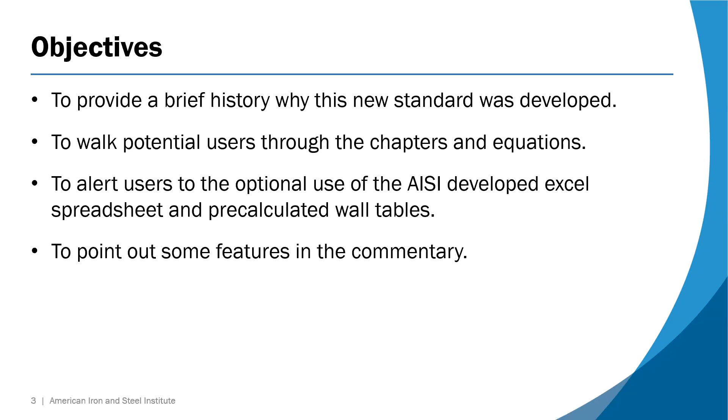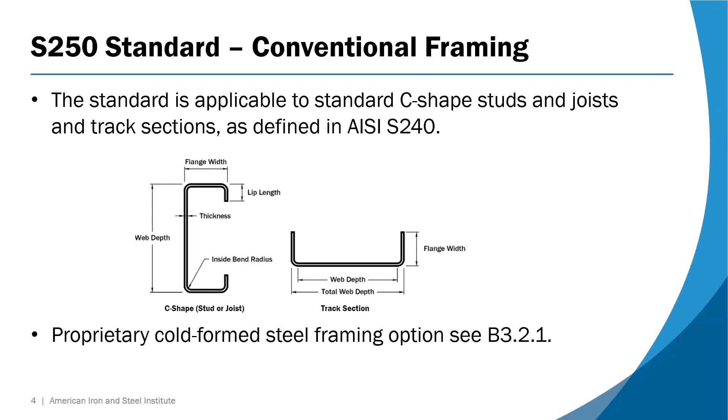So why was the standard needed? Well, back in 2014, one of the things the steel industry recognized was that, going through the different model codes, standards, guides, and other material dealing with energy efficiency, we had accumulated over the last probably 25 years multiple methods to do the same thing: how to calculate the effects of cold form steel framing in building envelope designs.

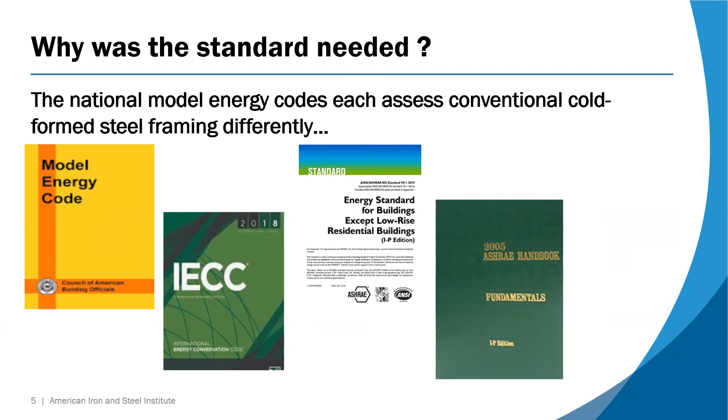For example, one of the first energy standards out was just after the 1990s oil embargo, standard 90-75. In there, they use the U factor based method. What's the U factor? Well, many say the U factor is the opposite of R value — that's sort of incorrect. R value is normally material related, such as the R value of insulation or a piece of gypsum board. Whereas the U factor normally applies to the entire assembly, not just a single piece of material. However, there were no specific provisions in the envelope assembly requirements for cold form steel. They merely said your wall had to equal an X U factor depending on what climate zone you were in.

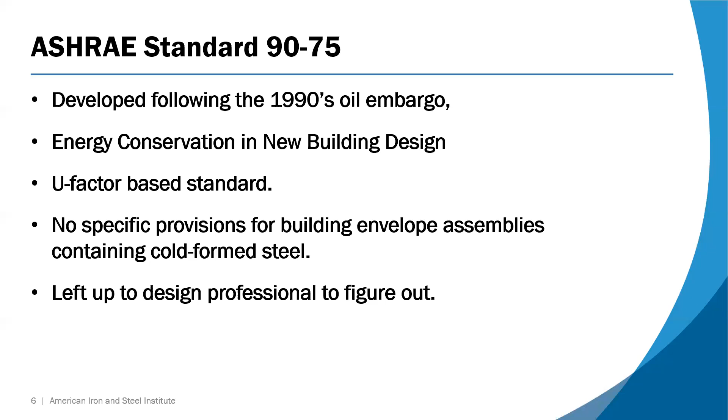However, it was left up to the design professional to figure out how to comply. This was frustrating. So by 1995, the Model Energy Code, which was developed by the Council of American Building Officials, which was effectively the three US legacy code developers at the time before the International Code Council came around, introduced the correction factor equations for opaque wall assemblies containing steel framing. The provisions contain both equations and a correction factor table to determine the impact of a piece of cold form steel framing in a wall assembly, and for only wall assemblies.

It was also limited only to 16 and 24 inches on center, another barrier that the steel industry has tried to overcome with the new S250 document.

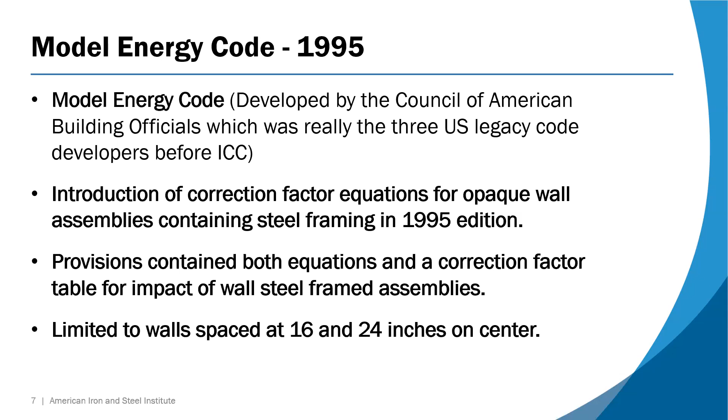Then in 1997, the ASHRAE Handbook of Fundamentals, which is produced by ASHRAE International—which you may have also heard about, ASHRAE Standard 90.1, produced by the same people—it's a non-consensus developed guide. However, it's considered one of the Bibles internationally to deal with thermal, moisture, and other subjects. It contains a parallel path and isothermal planes equations for simple light frame construction, such as nominal wood framing.

However, in 1997, it introduced what was called the modified zone method, which was created by the Oak Ridge National Laboratory. This became the benchmark because it was a more exact science on how to calculate the effects of cold form steel framing in building envelopes such as walls. It was extremely accurate. However, it did have its limitations.

It was limited to 16 and 24 inches on center, and it could only deal with insulation values in the sense that only if I had insulation in the cavity plus, say, continuous insulation on the outside. So it did have its limitations.

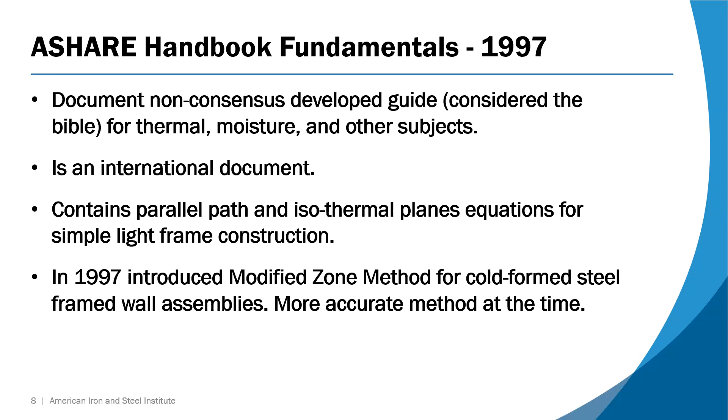Then the International Energy Conservation Code, which was first developed actually in 1997, but the 2000 edition came out with the parallel path correction factor equations, similar to what happened with the Model Energy Code in 1995. In 2003, as a result of the work by AISI, Owens Corning, and Oak Ridge Laboratories, as well as the Department of Energy, we introduced what could be best called correction factor methods for roofs and floors containing cold form steel framing.

The 2004 edition then changed, whereby the calculation methods, fairly simple methods, were replaced with simplified pre-calculated results installed in a table. Why? At that time, from 2003 to 2004, the Department of Energy and other groups wanted to make the International Energy Conservation Code much smaller and easier to use. So it was a usability change, if you will.

However, in 2015, we moved back to equations again. Now you can begin to see this buildup of how frustrating it was to keep track of things as well as determine compliance, because the number of methods kept growing.

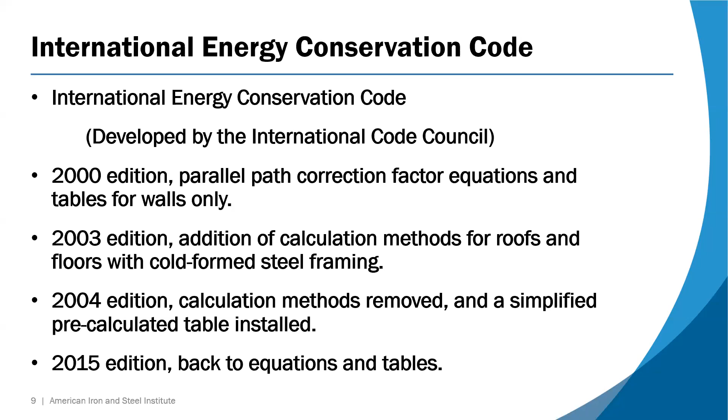The AISI Thermal Design Guide, while a guide only and not something usable for code adoption, did develop several methods within there to try to guide people on how to comply in different ways, depending on what jurisdiction you may be in, such as the state of California, which uses its own homegrown developed method of showing compliance by using simulation tools.

Whereas other jurisdictions might adopt the International Energy Conservation Code. Or if we go up to Canada, for example, they have the National Research Council of Canada's energy documents that are adopted by the provinces up there. A very good guide; however, again, it had the limitations on how far we had done research, namely for walls, which were primarily 16 and 24 inches on center.

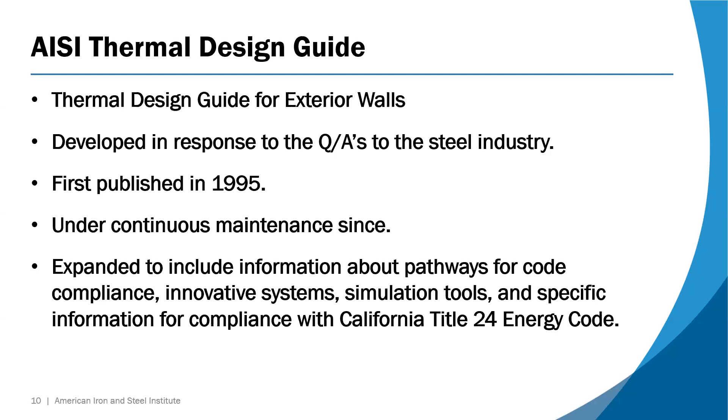And we found that in today's world, people are using different dimensions because of the type of construction going in place for a specific building project, or because of something that's needed to address, say, seismic or high wind regions of the United States. So in 2014, the Committee on Framing Standards, which is COFS, approved the proposal to create the new energy standard. The title at that time was North American Standard for Cold Form Steel Framing. However, as you see today, the title is a little different. That's what happens when you have a committee designing things.

The scope being that let's produce a document that can effectively address cold form steel framing for walls, for roofs, and if possible, floors in a standardized methodology. The whole idea being, let's produce a standard which can be adopted, versus a guide, which we've been doing for years, that can be adopted by a state or province or any other jurisdiction in foreign countries. And let's get rid of all these other methods so that we all work off an even playing field, if you will.

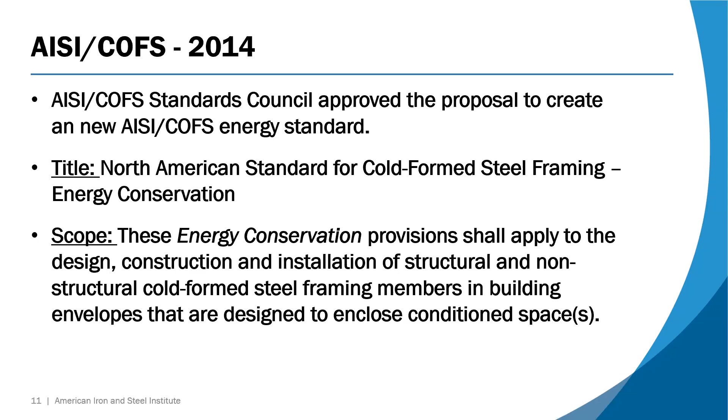So we went through research and development, hiring Morrison Hershfield, one of the recognized researchers in North America that does thermal analysis, and Dr. Merle McBride, retired from Owens Corning, who we had done work for years. Along with the task group members, they developed and finally published the document in 2021.

So what's the breakdown of the document? Well, its format is similar to the other AISI steel standards in that we have basic chapters covering administration, general provisions describing what the document will and will not cover, and Chapter B, which goes through the three types of typical C-shaped configurations in design.

We've also added an appendix with pre-calculated wall assemblies, so that rather than doing an equation, one can just look it up. We modeled that after what some of the codes had done. And finally, a commentary to help describe where to find things, such as the R values for other materials, or specific items about cold form steel to better describe it.

We keep the commentary because we want to separate the provisions themselves, the calculation provisions, from the commentary, so that the jurisdiction will be effectively adopting the standard requirements. As part of the adoption process by most states, they don't want commentary in code, so as long as we separate it, they're happy with that.

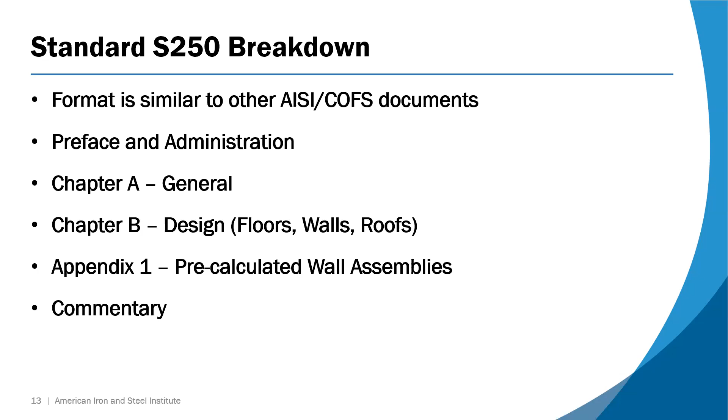Chapter B, design. That's just where we'll be going through the entire document here as to how it works.

The task group determined that at the beginning there was insufficient test data to support a proposal at this time for floors. Although we had done the research in 2000 for the 2003 IECC, we have a research request to do more there. That's not to say that calculation procedure from 20 years ago is wrong. We just want to refine it to greater detail so that we're not overemphasizing the need for insulation, but rather giving a true evaluation for floor assemblies.

Walls, there are 3 methods in the chapter. One's called OTZ, and we'll talk about that title in a minute. Method for proprietary steel, this takes a little work, and I'll describe that a little later on the methodology there. And appendix 1, where we have pre-calculated wall tables for typical designs, mostly for residential, but for commercial too. And finally, roofs. There are 2 methods there, using conventional steel joists and truss constructions.

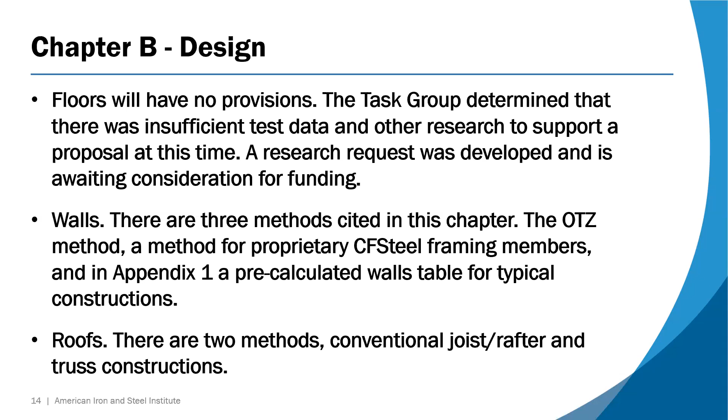Now, before I get into the walls method, are there any questions at this time? Do we see any in the chat box? Not yet. Boy, I'm really good today, I'm hot, look out.

Okay, we'll start with chapter B, walls, OTZ method. How did we come up with that? Well, we all sat around and thought of an individual name, overall thermal zone. The intent is to convey that the focus of our equations is the impact of the steel to the entire wall. It is a 3-dimensional effect, unlike many equations for wood or other materials which use 1-dimensional type equations. Our equations are based on 3-dimensional analysis, meaning we look at aspects in 3 directions, not just 1.

It's 8 basic steps with 12 equations. However, we realized from the beginning, if we're going to get this document recognized and used, we're going to have to make it simple for the general public, as well as design professionals, code officials, contractors, builders, and building owners. So we designed the methodology such that it only requires simple math, and all the other hard features, I'll call them coefficients, are already done for you. You only need to know the basic material types and simple math such as addition, subtraction, multiplication, and division.

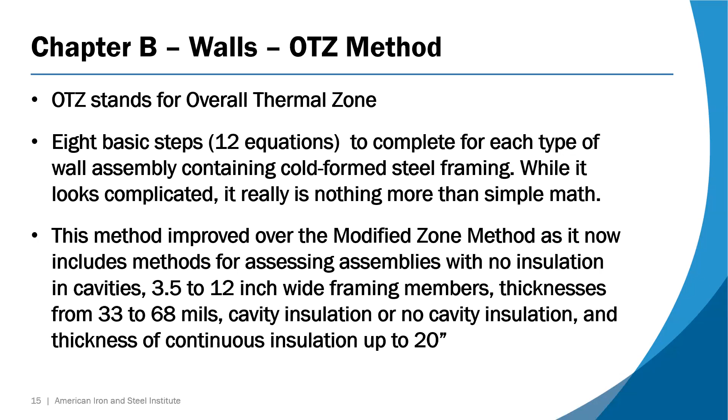Wall information, what does the user need to know? The wall assembly design, what are you designing for? That's going to be structurally based mostly.

Other impacts to the design may include acoustics, for example. You may be in a jurisdiction where the inside acoustics have to be assessed, and that may impact your design on how much insulation one puts in.

You also need to know the list of materials other than steel that representative thermal values of the wall assembly, such as outside sheathing, plywood, OSB, gypsum board. Inside sheathing, what's that going to be? Just gypsum board or some other product?

The types of insulation you have in mind, the exterior siding, et cetera. The other items needed are all provided for you, such as the list of coefficients, conductivity values, and other data concerning steel presented in tables.

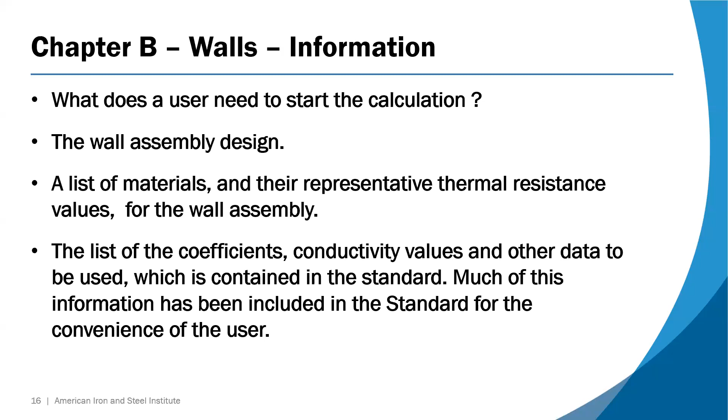So one merely needs to pick the size of the member and then take the numbers that are equated to it in each of the tables. So let's start with a wall type here.

What do we see? We see a wall type with exterior air film. We chose a stucco siding. We put on continuous insulation, which we call foam sheathing, gypsum board outside, partial cavity fill with batt insulation. In this case, we're going to use a 2x8 C-shaped member.

While not normal in the field, we know that 2x4 or 2x6 is more common, but in this case, just to show you how far we can go with this, we also have an airspace in the cavity along with the insulation, which is not unusual in today's market.

Because many builders, as well as owners, in order to be cost effective, want to run conduits of wiring, telecommunications, even piping through the outside walls. If they don't have to muck with the installed insulation in order to install their product, that's a better labor saving mechanism, if you will.

And then gypsum inside and interior air film. Be aware, air films are a static number and we provide those for you. However, for the other ones, we have to have the designer, owner, or builder go out and find the numbers from the manufacturer and use those in the equation.

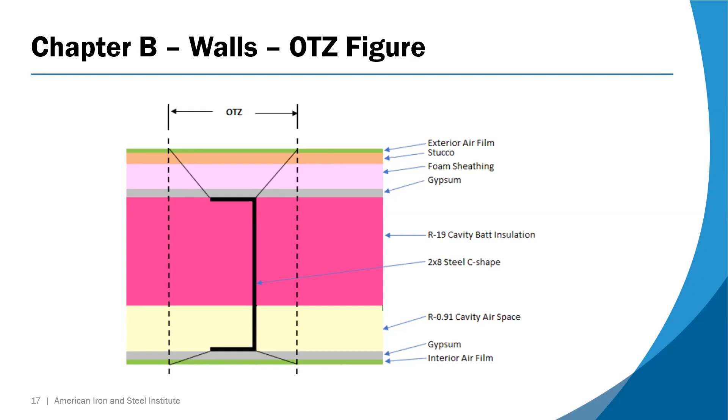Now you notice here, the OTZ is that area around the stud. Here you can see its total effect three-dimensionally. This is the effective area of how much cold form steel can be affected by the transmission of cold to the heated or conditioned side of a building.

So in this case, we chose framing spacing 16 on center, flange width 1.6 or 1 5/8, web depth 8 inches, base steel thickness 43 mils or 0.0428 inches if you use a ruler, and the conductivity of 495, which is out of one of the tables there. So here we have the basic steel dimensions.

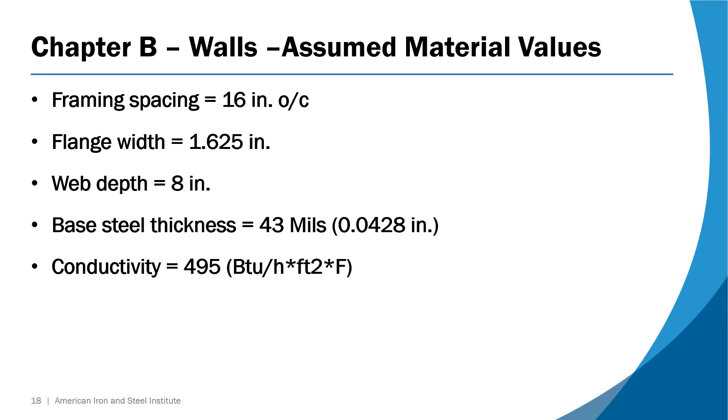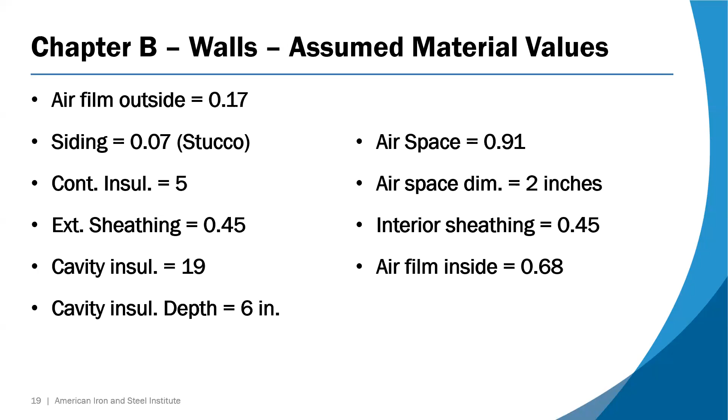Now for the remainder of the materials that make up the assembly, the outside air film, the siding, the continuous insulation, sheathing, cavity insulation depth, we have to know about it. Could be full depth, half depth, or even 0 depth. If there's an airspace, that's optional. In this case, we put it in just to show you how it works, as well as the airspace dimension, interior sheathing, and the inside air film.

So now we have all our basics. What are we going to do now? Well, for the national model codes, such as standard 90.1 and the IECC 2024, they've added some additional features that we need to be aware of beyond what the standard currently states.

Item A: where steel frame wall contains no cavity insulation and uses continuous insulation outside of the cavity to satisfy the U factor maximum in the energy tables or climate zone tables, the steel frame wall member spacing is permitted to be installed at any on-center spacing. Why? Because if I've got my insulation outside, that's effectively demonstrating compliance, and the framing member is not penetrating it in any way, shape, or form, so it doesn't matter what my framing spacing is. I just use the outside insulation value.

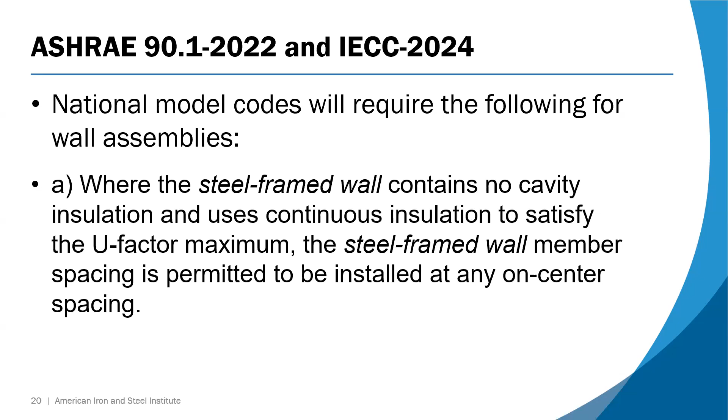B: where the steel framing wall contains framing at 24 inches on center with a 23% framing factor, or 16 inches on center with a 25% framing factor, the next lower framing member spacing input value shall be used. What does that mean? If I'm doing a load-bearing wall condition for a building, such as a house or a small building up to 9 stories of cold form steel, and my walls are load-bearing, I'm probably going to have, depending on the spacing, a 23% or 25% framing factor, just because of the number of members I have to have there structurally.

So what do I do? Well, when I use the equation, rather than using a 24-inch on center value to calculate, I go down to 16. And if I have a 16 inches on center in my design, I go down to 12. That's in order to compensate for the amount of framing I'm going to put in structurally for a building.

Where the steel frame wall contains less than 23% framing, example curtain wall, I can just use the regular values of my equation. So if my framing is at 24 inches on center, I install 24 inches on center in my equation and I'm good to go. Why? Because I have far less framing taking up space in my building envelope wall than I would if I use load-bearing conditions where I have all sorts of stuff to deal with, such as jack and king studs, headers, sills, etc.

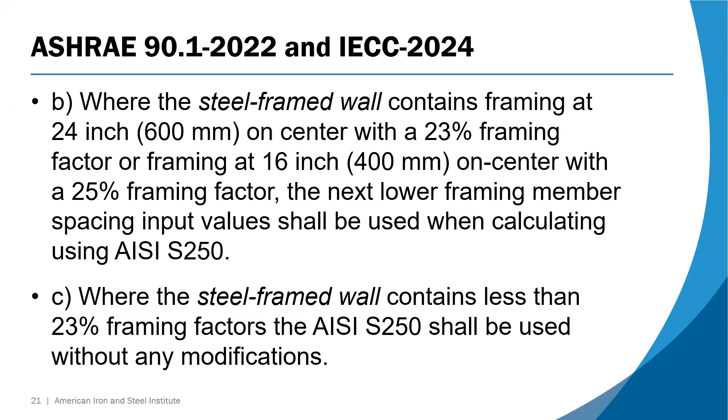Anytime I see the letter C in the equation, I've already got that number chosen from a table, so I've got half my work done already. The other values I need to know are what is the cavity insulation and what's the continuous insulation, and is there any airspace. And then I can calculate my first equation here, which is determining the overall thermal zone.

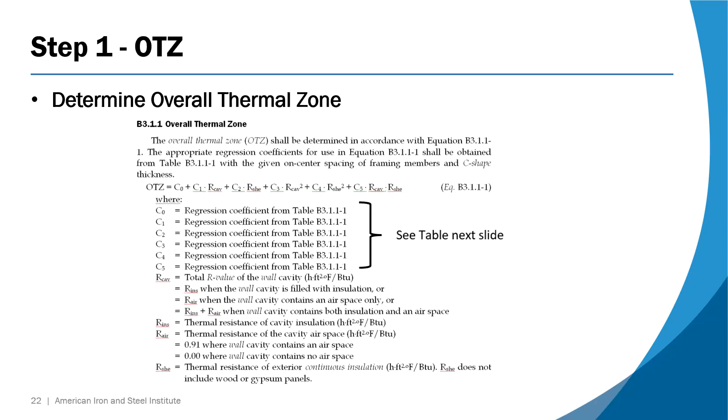If you remember that diagram I showed earlier, the impact of the cold form steel framing. And when I talked about all the C values, if you recall, I chose a 16-inch on center framing type, the C-shape designation thickness 43, and they're all my numbers that I need to know to install my equation. That's half of my work done.

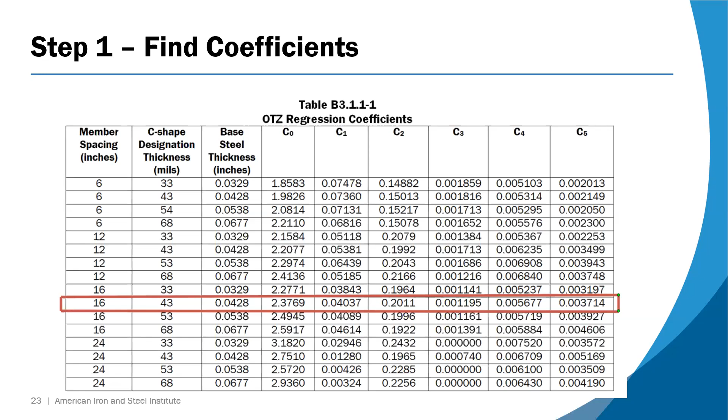I move on to my next equation, where I have to determine the framing factor. And there, again, I go up and I know what the mils of my framing member are. I know the flange width, and therefore I can just basically calculate by dividing.

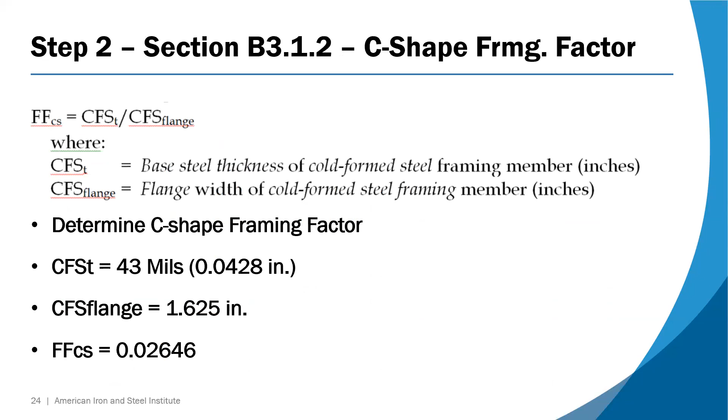Step 3, same thing, I'm in a division equation. Here I'm determining the C-shaped path and its impact. The depth is 6 inches. However, note the insulation is only in contact with the stud that I'm calculating, not the total depth of the framing member. In our case, we chose 8 inches, but only 6 inches is in contact with the framing member web, and that is of the insulation.

And just as a reminder, everybody, when doing cold form steel framing, we need to specify, when either putting our specs together or purchasing a product, we need full width batts from the manufacturer, not nominal. Full width, because in steel framing I also insulate the inside of the steel web of the C-shaped member, not just between framing to framing in the wall.

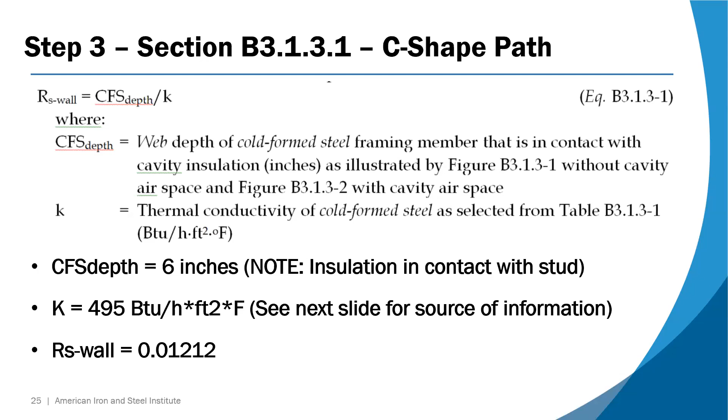My K value in bullet point number 2 is determined from a slide that comes next. And so by putting those two values in, dividing, I'm done. I get my result of 0.012. I put that in my pocket, keep it for a future equation, and you'll see how that works together as we move on. Step 3, again, there's where I got my, if you see on the far right, my 495, what's called thermal conductivity, or it's also referred to as the K value.

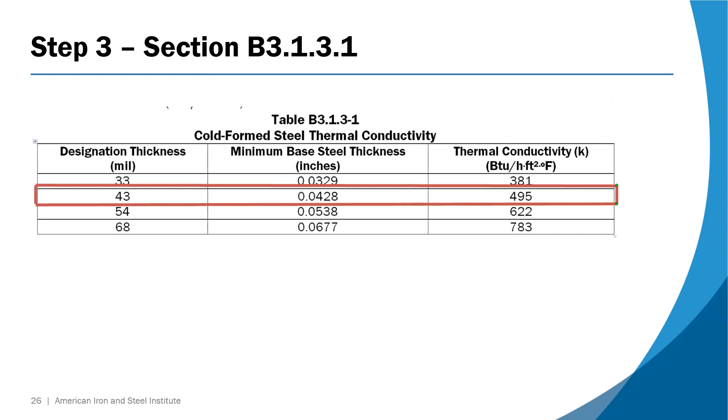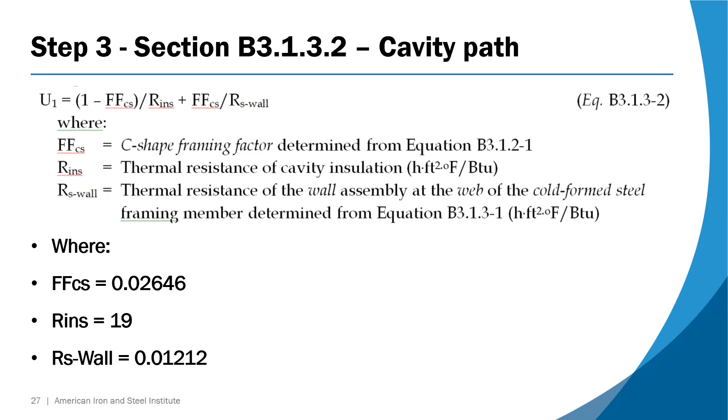My next equation for the cavity path, I'm looking at the thermal resistance of the cavity insulation, the web, etc. And I'm doing, again, a very simple equation, subtraction, division, addition, and I'm done. I'm now beginning to install some of my values. If you see under the equation FFCS at the top of the bullet, below the where sign if you will, I'm now pulling in values from other equations and installing them into my equation here. I will continue doing that throughout this in order to figure out what effect cold-formed steel has. Here, all I'm doing is turning my R value, or U factor that I've gotten so far from the previous equations, into an R value. I now put that into my pocket, and I will use that in a later step.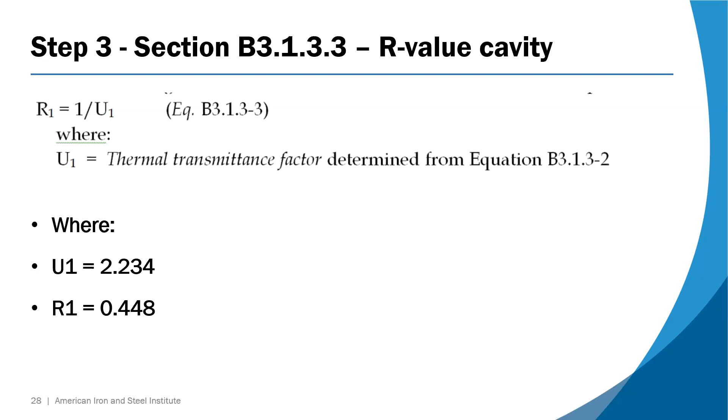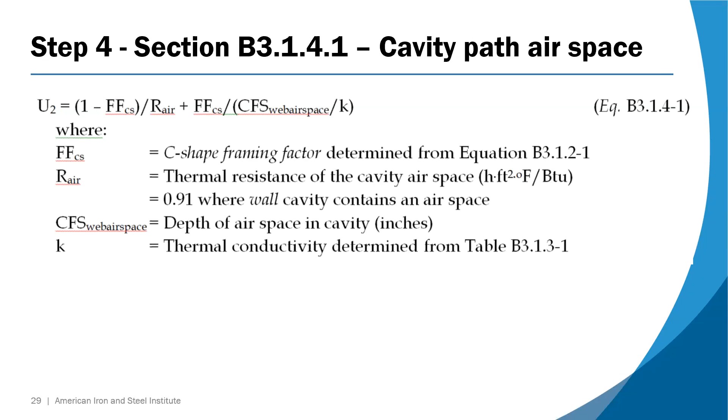Again, I use the cavity path, and I'm determining the effect of the web airspace, in this case that 2 inches I mentioned. Again, simple math, subtraction, division, addition. And I'm coming at the net result, which is a U factor. And here we go with the values I've installed.

Now the 0.91, where did that come from? We get questions about that all the time for R air.

0.91 comes from ASHRAE International, two resources for that: the Handbook of Fundamentals and ASHRAE Standard 90.1, which determined through research that if I have a cavity and the airspace is greater than, if I recall, 1/2 inch, or the full cavity, I can assign an R value of 0.91 simply because I have an airspace, and that airspace has some insulation value. Not a huge number, mind you, but it does have a value.

Again, the web airspace is 2 inches, the K value 495 we got from our table, and we come up with a U factor of 7.6.

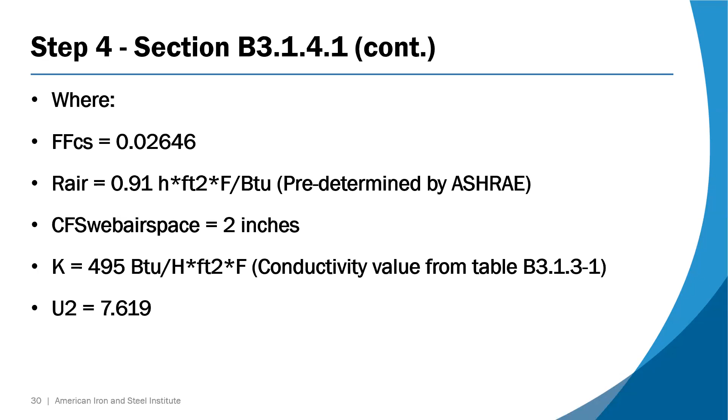I now move to part 4, or step 4. I'm turning my U factor into an R value. I'm putting that into my pocket because I will use it later.

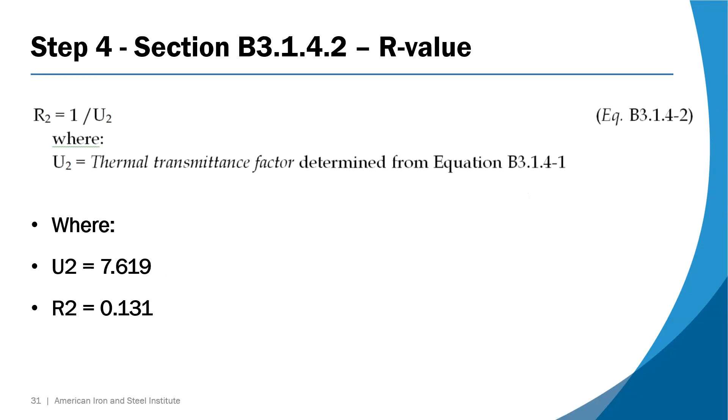I'm now combining the two R values, simple math, addition in this case. I get the values from two previous sections, or their equations, results if you will.

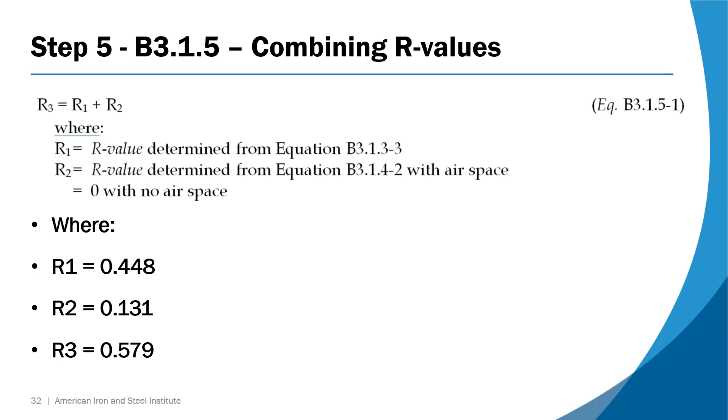Now I begin to calculate the two paths you saw earlier in our drawing. You'll see it in just a minute.

I'm calculating the entire wall now. In this case, air film outside for R sub O. Side exterior is the thermal resistance of the exterior siding. The sheathing, the R value determined from a previous equation. Interior sheathing and the thermal resistance of air film.

Again, the air films are a standard value and apply to most any walls: 0.17 for an outside air film and 0.68 for an interior.

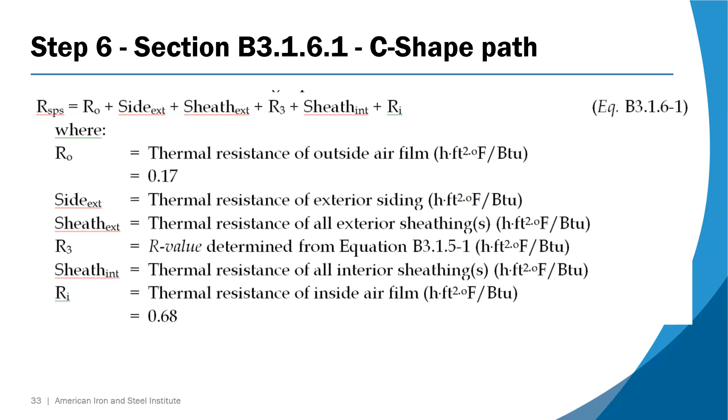I'm now putting together all my work into final steps to give me a final value of the impact of not only the steel, but the impact of the wall without steel, and then combining the two at the end.

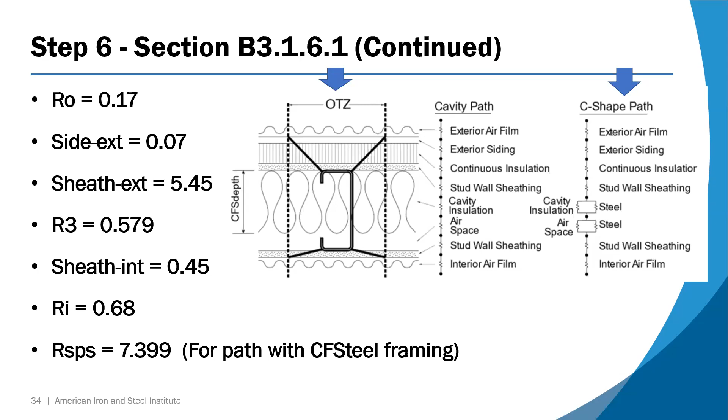This equation for the cavity path is the same as what we saw before, except I'm excluding the steel. And that's all I'm doing here: an addition of all the member components, in this case siding, insulation outside and inside, air films, the sheathings.

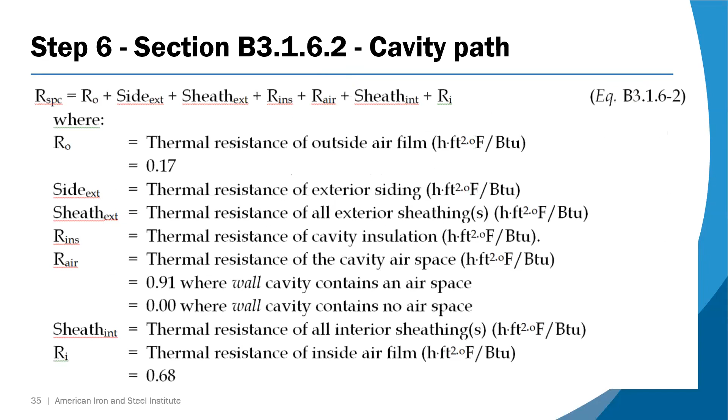Finally, step 7 and 8, I'm beginning to finish my work. Again, I'm pulling from the OTZ at the very first equation. I'm putting that value and dividing it by the spacing of the cold form steel framing to show its impact.

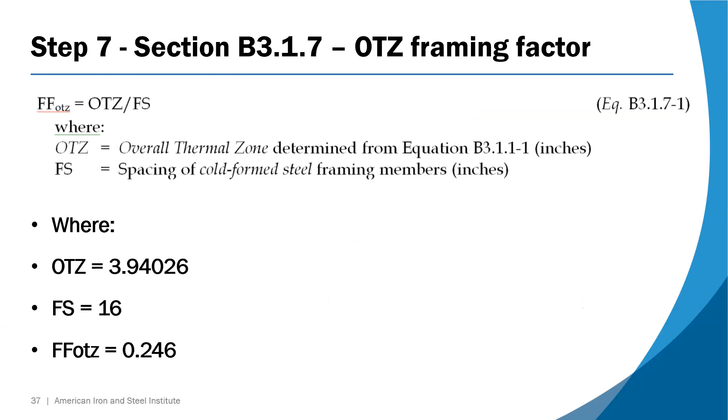And finally, my net result here is a case where I'm dealing with subtraction, division, and addition, where I'm taking the two wall types, the impact of the steel and the impact of the wall without steel, combining the two, and my result now is 0.061, which is a U factor number.

U factors, by the way, don't have any scalable value, they're just a number. I now compare that to my energy code that I'm complying with.

I look in my code and say, if I'm in Memphis, Tennessee, I'm probably in climate zone 3. And if my maximum U factor is 0.070, I've complied. I can now get a permit and put up my building.

Now that I'm at the end of this, do we have any questions up to this point? I know this was complicated and rapid succession, but let's see if there's anything that's come up for the most complicated part of this document.

Nothing has come up quite yet, but if anything does, I'll be sure to let you know.

Very good. Again, feel free to ask any question whatsoever, and we can try and go back to it and help you with the answer.

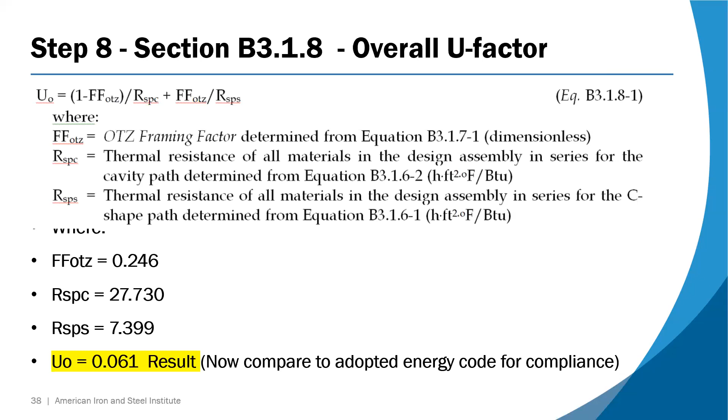Other than standard C shape, this was put together for design professionals, but more so for code consultants, specifically those who deal with thermal analysis.

Somebody raised the question: okay, I've got proprietary designs, how the heck do I figure this out? Well, what we said was...

Let's design a formula that has 5 steps and uses what's called a linear regression curve. Basically, another phrase for it is a curve fit approach, where I use hotbox testing data or other testing data to complete the analysis. In the case of ASTM C1363, that's the hotbox test that most everybody uses.

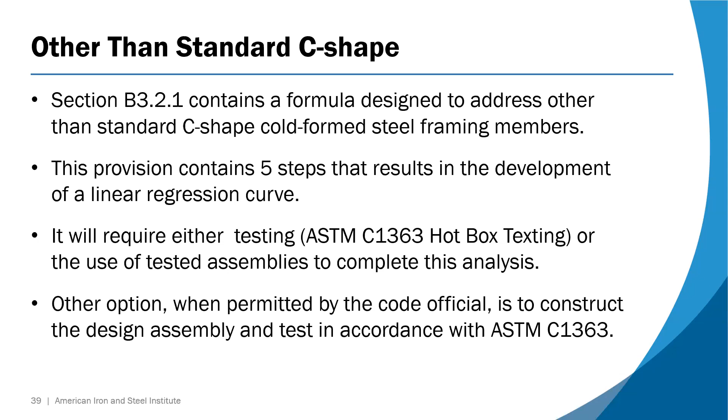Oh, that's the appendix already. I'm sorry, I moved too fast.

So what I'm doing in this one is taking 2, 3, 4, 5, or even more test results, putting them on a graph, seeing how the dots line up, and putting in a curve in order to substantiate how the wall will react to thermal transmission from hot to cold or cold to hot. I do need some background and experience to understand research projects and the test data in order to make sure I'm comparing oranges to oranges. I'm putting data points on a graph to create a curve, then finding where my designed wall fits on that curve, and using that as the basis for determining the maximum U factor for that assembly.

Most people do hire this out because the machinery today for calculating this has gotten very sophisticated but simple to use, and it's becoming more widely used and more widely accepted.

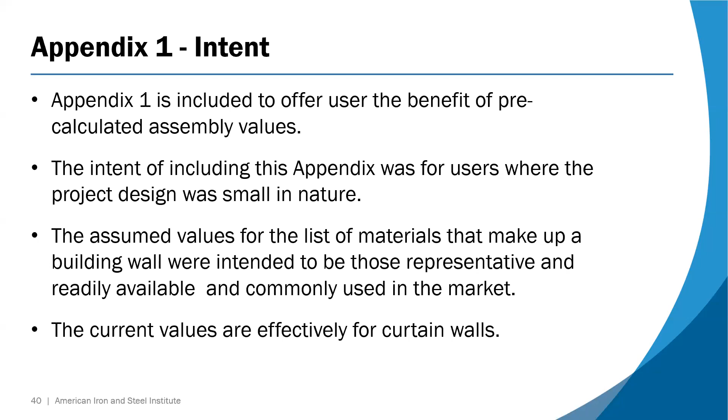Now let's move on to the next item, Appendix 1, where we had pre-calculated tables. In our Appendix 1, we predetermined what the assembly would be, and this is a cut and paste from that. Basically, framing as shown in the table: flange width at 1 5/8, 43 mils, conductivity 495. Sounds similar to what we did in our example.

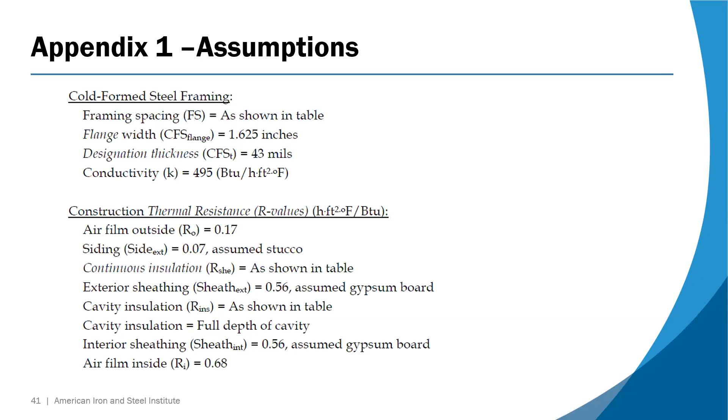And then our other construction materials: siding, continuous insulation, exterior sheathing, cavity, etc. Using those values, which are probably the most common that we see, although not exclusive, we began to put together tables that said, okay, if my framing member is 3.5, 6, or 8 inches, meaning the web, and my cavity insulation is 0 through 25, here's what happens when I add, say, R1, R2, or R3 to the outside of my wall. Here's what the U factor turns out to be.

Simple menu approach, like going to a diner. You just choose what kind of wall design you want, and then see if what you want to put on for continuous insulation complies with the code. So if I choose, for example, 3.5 inch framing, a cavity insulation of 15 batt on the inside of that cavity wall, and I'm putting R3 on the outside, you'll see that the value equates to 0.079 U factor. I now look into my code, and as long as I've got a value in the code that's greater than 0.079, I can demonstrate compliance.

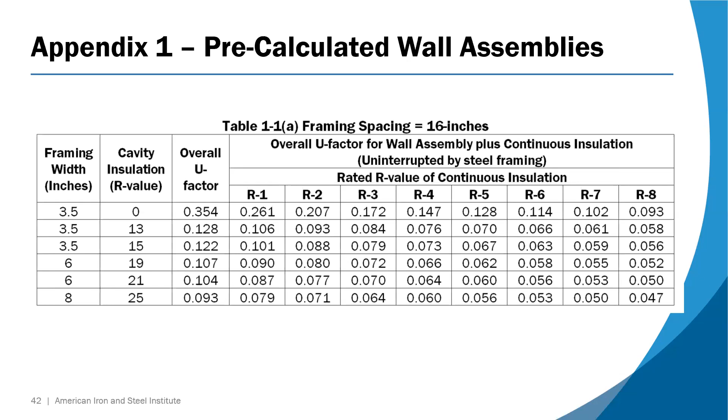Now, another feature we put together is a calculation spreadsheet. We got the idea, and some of you may recognize this, from the Department of Energy's creation of the COMcheck and REScheck calculators that most building officials in the United States accept as an alternative method of determining compliance. Well, we've done the same thing here.

First, we start off with the information you have to put in to start. This is essential because if you're going to do a calculation, we have this in there so that when you see the results on another page and print it out, the code official can look at it and determine if you followed the rules and demonstrate compliance.

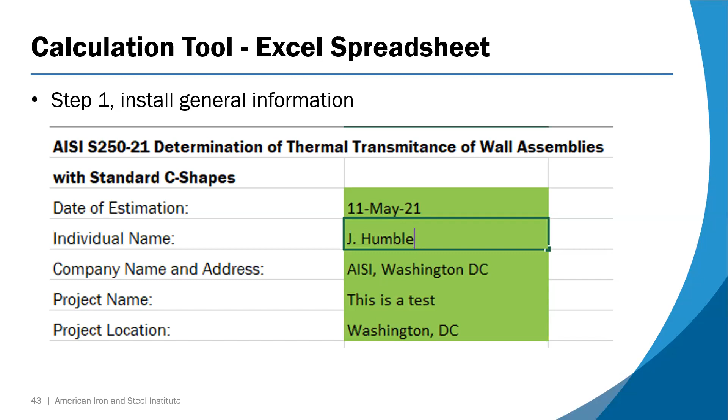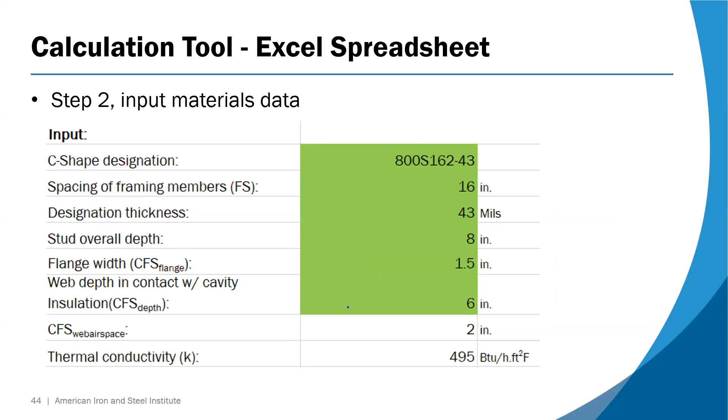In addition, we've colored the boxes to show you that these are the only boxes you can modify. We put in the shape designation simply as a recording mechanism, but the important features are framing spacing, designated thickness of the framing, stud depth, flange width, etc. You install the numbers just as I showed how to do the hand calculation method before.

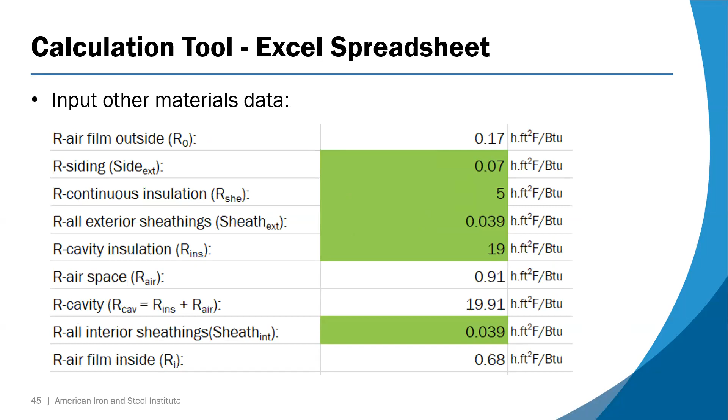Here's some other additional features, again the same types of material data that I showed at the beginning. We fill those in, and within seconds, as soon as you click outside the box, you effectively see the following: at the top the name and the date, so you can keep track of your design. All the configuration inputs are shown, and the result at the bottom shows what the net effect is for U factor.

You now compare that with the code in effect. This is a good thing to hand over to the code official who could do the same thing. He could take it and say, okay, give me a few minutes here. He may have the same calculator, he'll do the same inputs, and if he comes up with the same number, you're good to go.

It's also much faster in the sense that, okay, now me as a building owner, design professional, or even a contractor, can modify it to try and get even better stringency, depending, and at the same time, depending on what the cost of the project is, to try and come in under budget with a better design, such as if somebody was going for a LEED project, a GBI Green Globes design, or something like that.

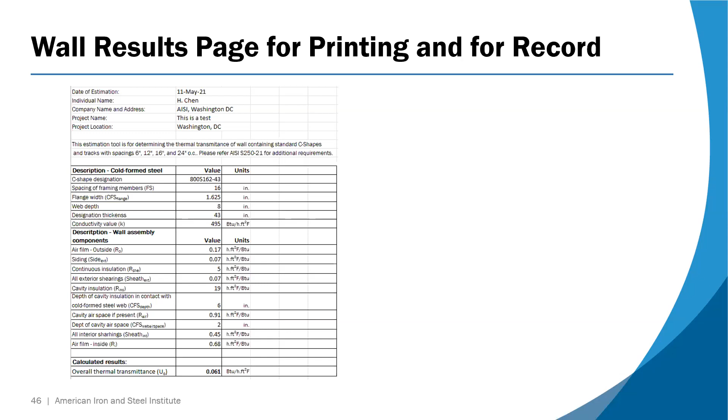Now let's start with roofs. This covers only conventional C-shaped only. I can't emphasize enough, however, proprietary designs, by the way, which most roof trusses are, can use these procedures. However, the result will be a more conservative result for the roof assembly than if they hired, say, an energy professional to do a computer model of it, or even doing a test.

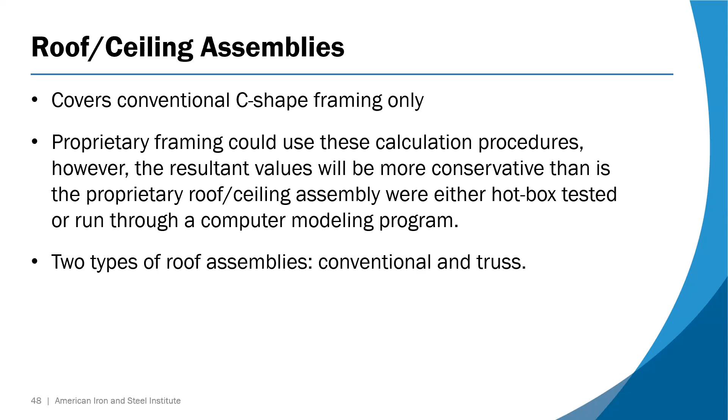There are two types of assemblies in this case, conventional and truss type. For conventional, these are standard C-shaped. It's a pitched roof design, most likely. And all I'm doing is addition, multiplication, and division.

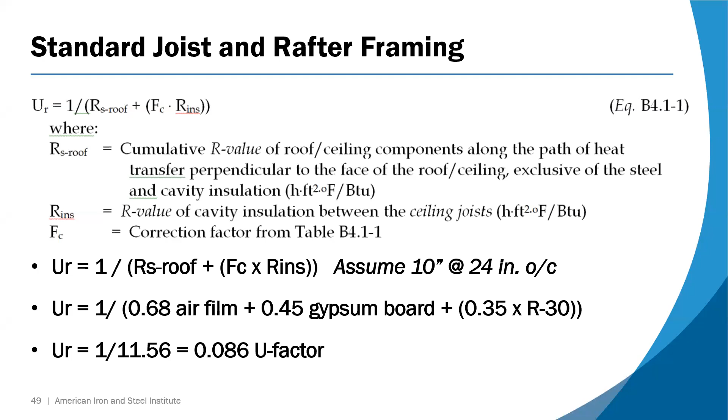Just like the walls of 1995, we're basing this off a correction factor method, meaning if we know our values for the insulation either in the cavity or outside, we merely apply the correction factor to the insulation within the cavity only, and assume all other values are free and clear of the deduction that the steel has because they're outside the framing. We did an example equation here, fairly straightforward. By the way, these equations are also in the spreadsheet for you to use if you want, but quite frankly, you can do it faster on a hand calculator.

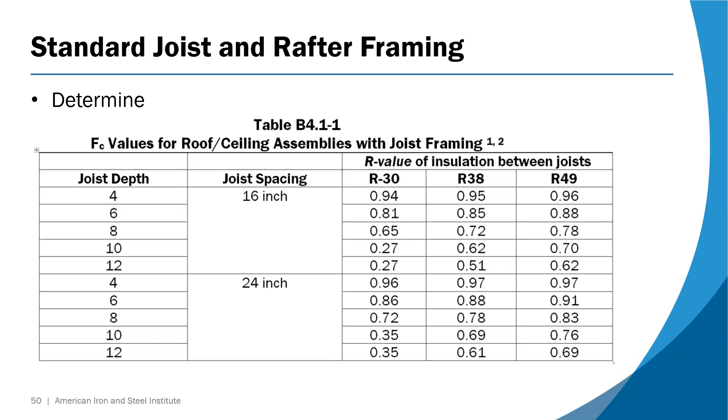As I noted before, the same thing we put in the roof calculator as we did for the walls, same calculation sheet. All the green boxes, you fill in the blanks and it produces a value for you in a matter of seconds.

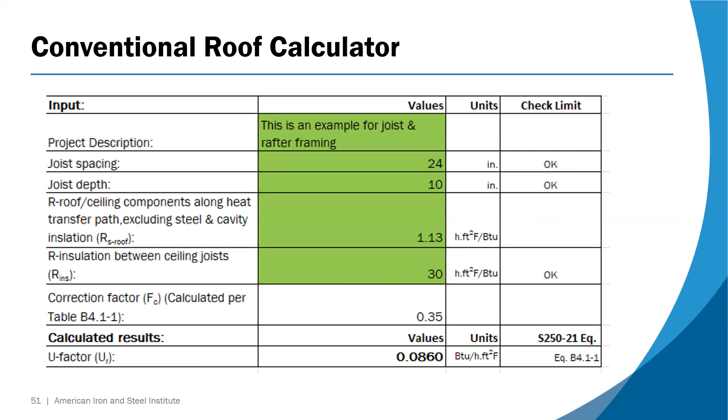I install in the RINS location what my value is for insulation, and for a simple truss with no continuous insulation, I simply execute the calculation and I have my number.

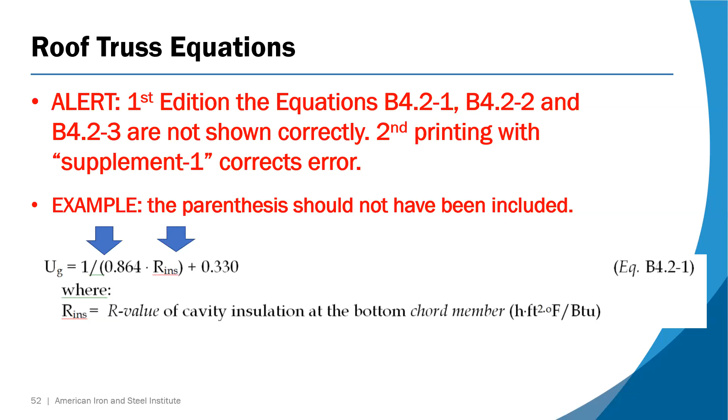And here's one of the example equations, if you will. You can see how much the impact to steel is without continuous insulation. Steel does have a great conductivity value. However, it also has great structural capabilities and other benefits. It's just that when we come to energy, steel does a good job of transmitting.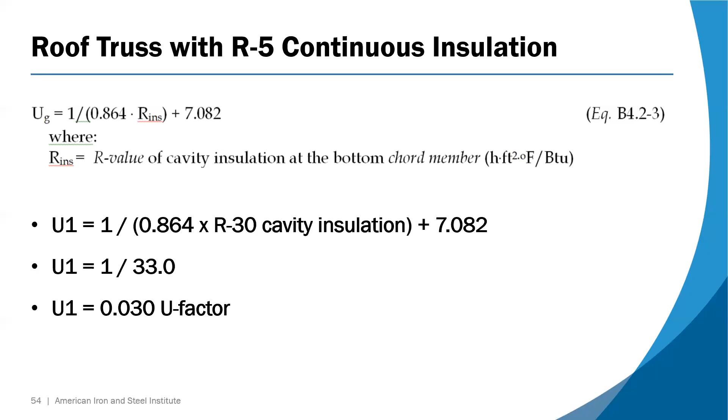And again, we have the same truss calculator in it. However, ignore the 'do not use' - the new calculator took care of that problem you saw earlier. That has been corrected. But the same thing here: I fill in the blank of my general job description, fill in the values in the green space, and it automatically calculates for me.

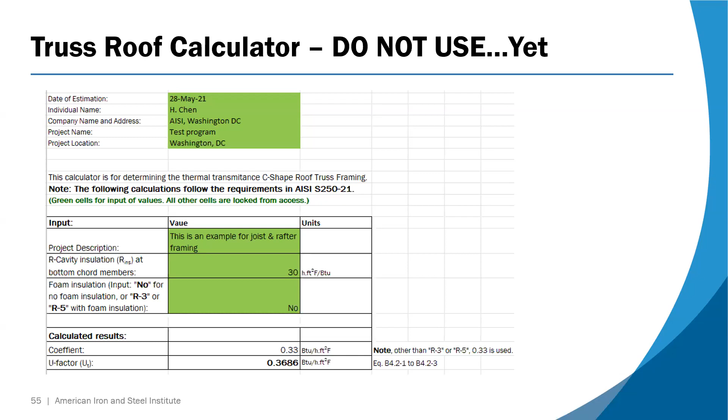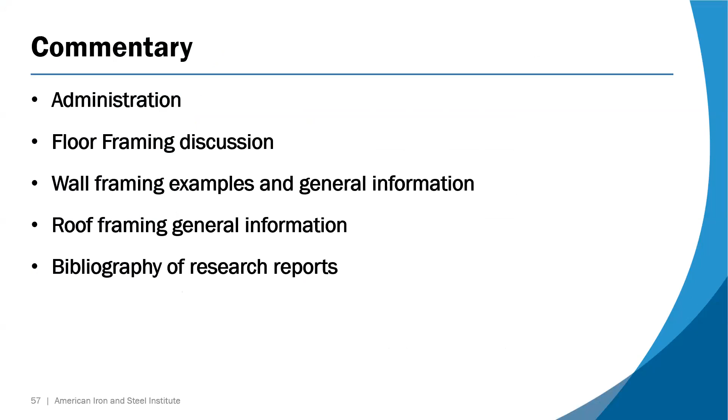Commentary. We've put several things in the commentary: a discussion about administration, about floor framing discussion, wall framing examples, roof framing general information, and a copy or listing of what the research reports were.

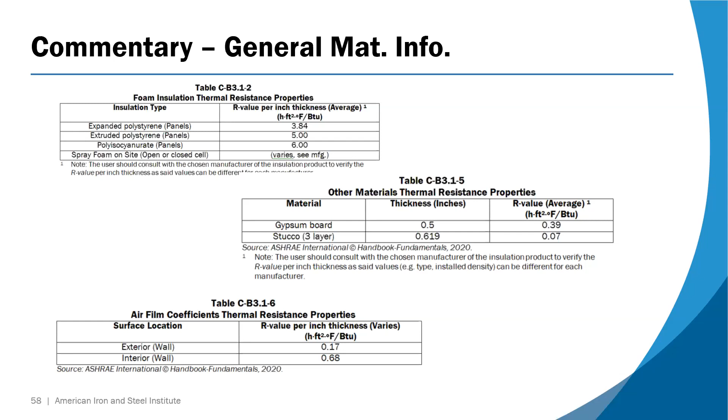And here are some examples of general material information. However, if you are building in specific jurisdictions, most code officials want to know the R-value of, say, the expanded polystyrene or batt insulation, simply because they're all different. For insulation manufacturers, we have to recognize they're competing against each other, so they're going to have different values simply because they're trying to get market share. And that's not good or bad, that's just the way things are. Gypsum board is pretty stable, as are air films - they're pretty standard or static, if you will. They don't change. But just to help you guys along, if you want to use that methodology.

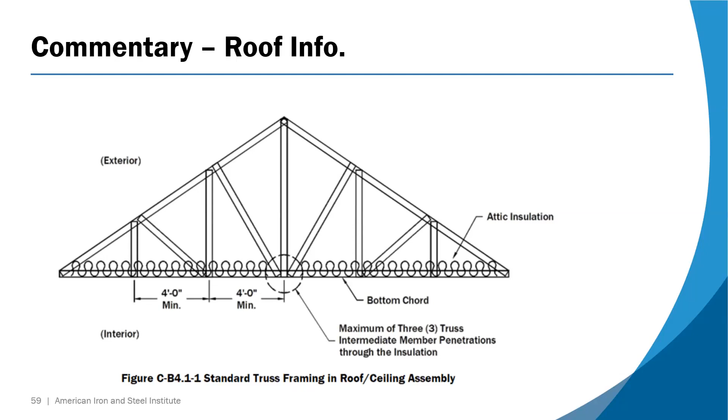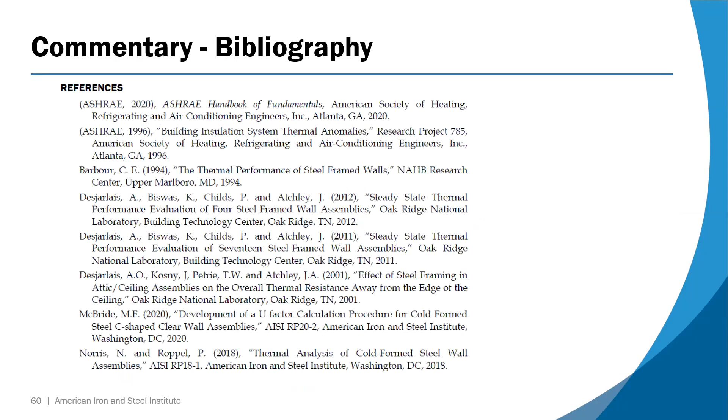And now it's the end of the program. We're at 1:49. Are there any questions or comments that have come up that we can help these people with? None have come up yet. I know, you are just so thorough, Jonathan. I can't encourage people enough—here's $20 just to ask something to make me feel better.